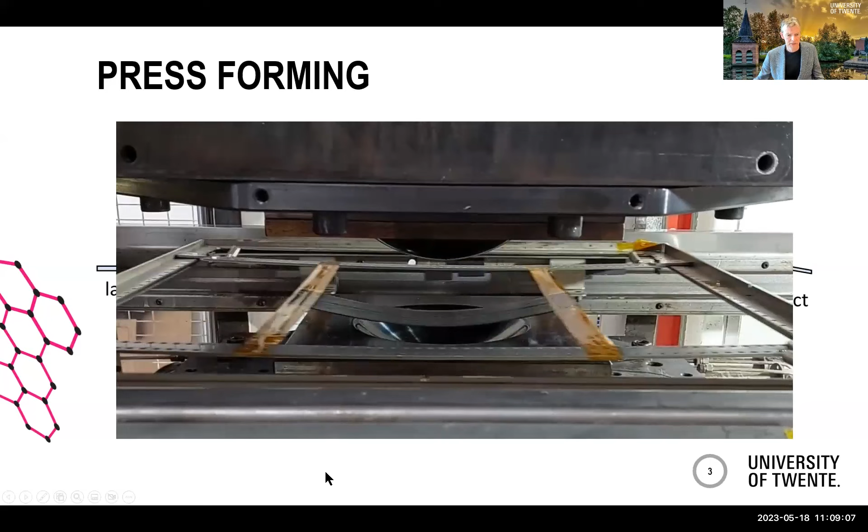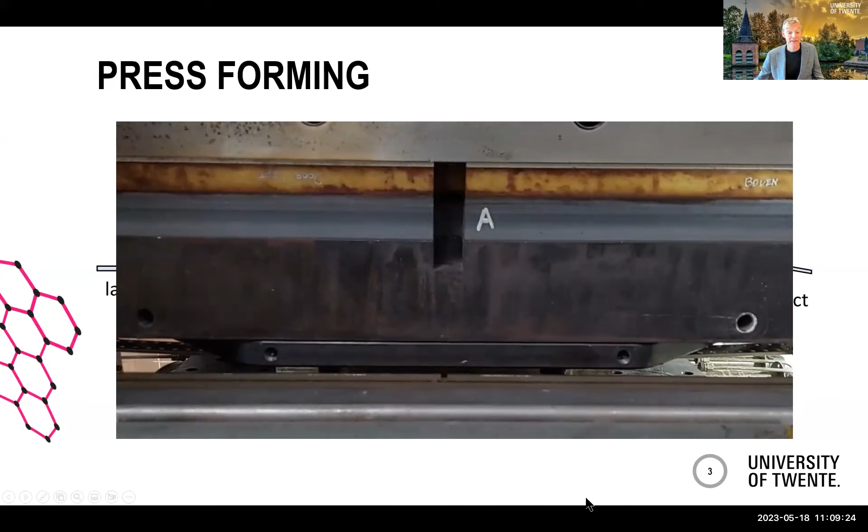So looking at this process, what does it look like in practice? Here you go: press forming. Here's a laminate, closing molds. We don't see anything, and that's it, more or less. Formed, closed, we don't know what's happening. And then we hope the product that evolves from that is good for our application.

Now things can happen in the meantime. In the time we don't see anything, with the tools closed, there can be formation of waviness at a very fine level, millimeter or sub-millimeter size, or bigger but still small wrinkles with some deconsolidation here and there. And over a fairly large spatial scale, defects like these can arise up to large folds, over longer lengths of centimeters, easily detected by the human eye. Things you don't want in your product, and things you'd rather prevent when designing a product and developing the tools to manufacture them.

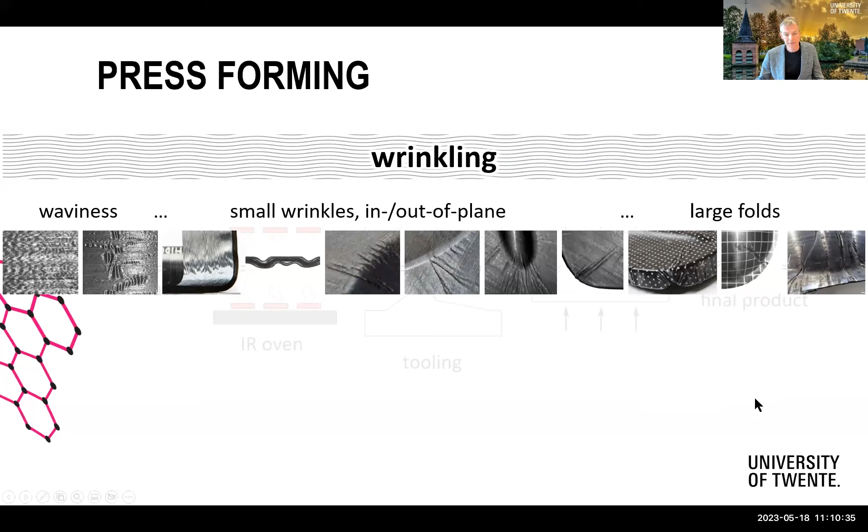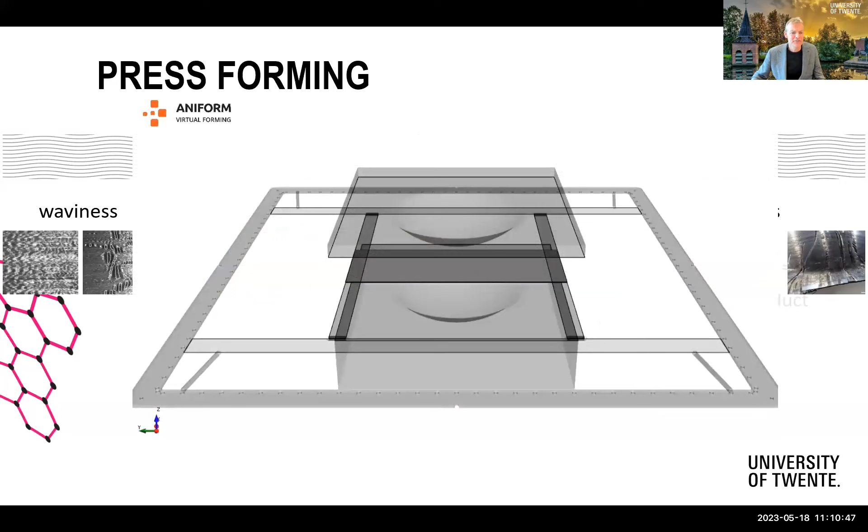Now, in between the two mold halves, we can't see anything. So even for that, simulations are already very convenient, because there we can easily see what's happening when the tool is pressed. We can see some things happening during the process. And of course, when the tools are completely closed, we can no longer distinguish any defects which have arisen.

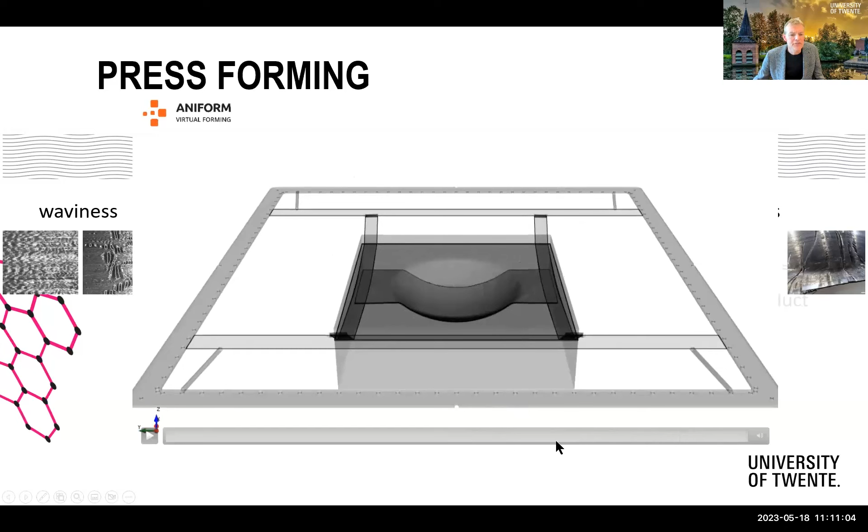Well, of course, that is very much part dependent. So here's, let's say, a fruit basket, a composite fruit basket. You always wanted to have one like these, but here you can obviously see quite severe wrinkles in the flanges of this shape.

In forming software, you have the ability to easily change the size of the blank, the shape of the blank, the laminate supports, etc. And you have the relative ease of changing the geometry of your tooling to get a product without these nasty defects, which permits actually using the products you've manufactured with all your efforts.

So today's lecture is a bit on the background of this kind of virtual forming, where there's a forming simulation requiring, of course, all sorts of input data, giving output data, obviously, which need to be interpreted. And with that, hopefully, the designer can come up with ideas for improvements.

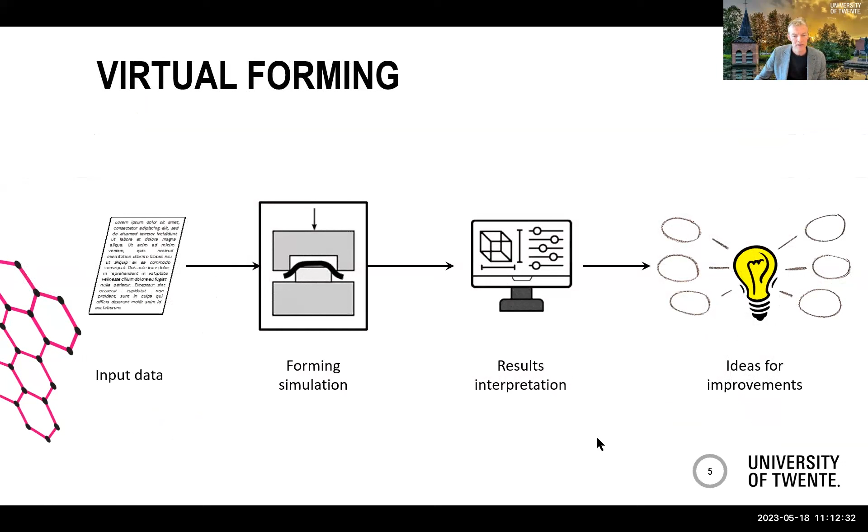So today's lecture will be on the first three items in this list: the modeling with extreme anisotropy, the input data, so the material characterization and what to do with that, and what to do with the results, the interpretation of the results, and what to do with that.

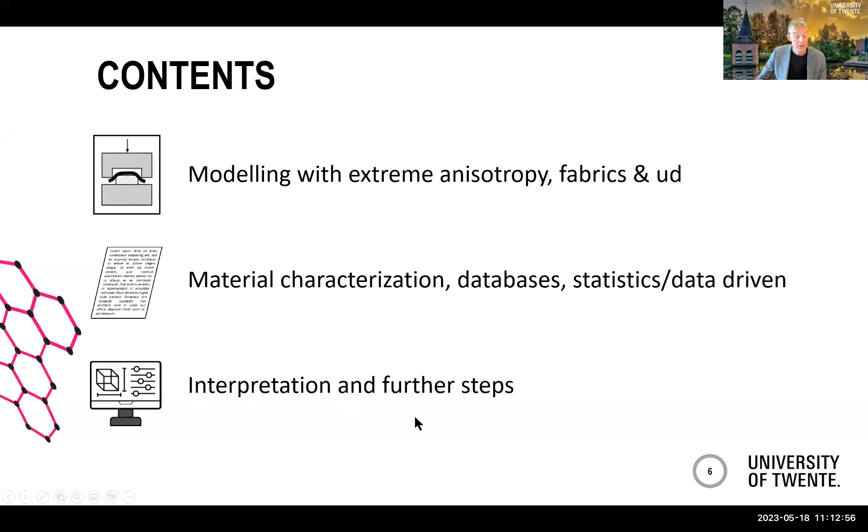Well, let's start with the basics of forming and deformation mechanisms. It's already long recognized that it's easier to decompose the complexity of composite laminate deformations into elementary deformation mechanisms.

Originally, folks worried about this biaxial effect under tension, where loading in one direction affects the deformation and stiffness in the other direction. But rapidly, the focus was more on intra-ply shear of, let's say, fabrics in this example, inter-ply sliding of plies to each other, the sliding of the whole laminate against the tooling, and the bending of plies and laminates. Whereas the latest one, compaction and consolidation, is obviously important for the final quality of your laminate, preferably without dry spots, without voids, and all these sorts of defects.

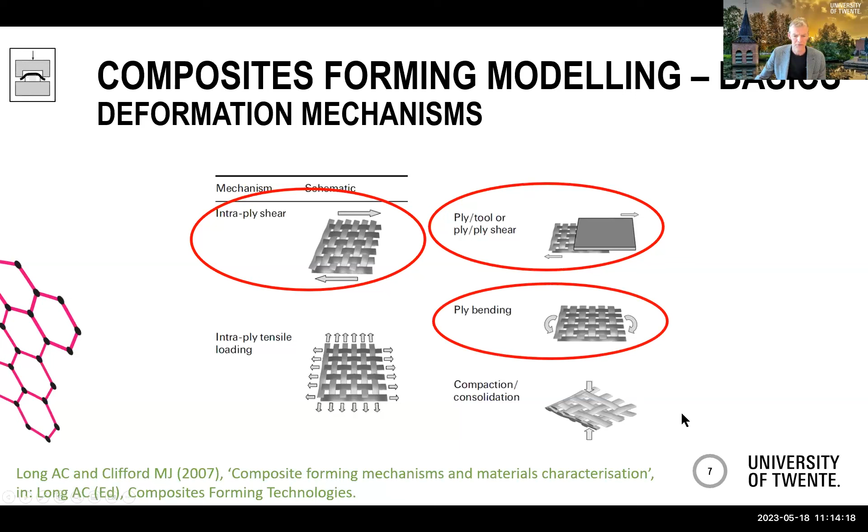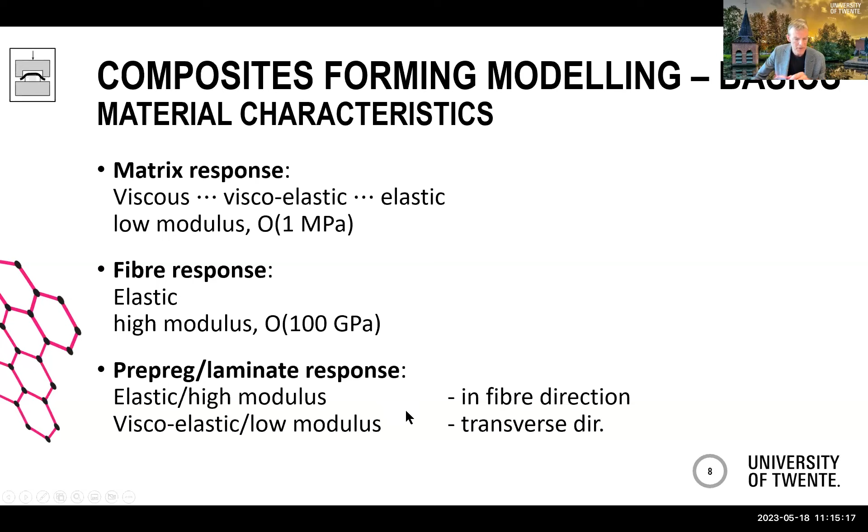If we look a bit closer at the material we're trying to describe, remember we're talking about primarily thermoplastic matrix composites in molten condition. The matrix is obviously in a viscoelastic state, and if we were to assign a modulus to that, it would typically be in a rubbery region, so low, order of magnitude 1 megapascal. Whereas the fibers remain in their elastic state, high modulus, order of magnitude 100 gigapascals. So combining that in a prepreg or a laminate, this laminate has a high modulus in the fiber direction and a pretty low modulus for any loading in any transverse direction. That gives rise to what I would call extreme anisotropy, 5 decades of difference in moduli.

And in this kind of material, large rotations and deformations are possible, except in the fiber direction. We would expect negligible fiber extension during forming. If we would get significant deformations in the fiber direction, then I would guess something is going wrong.

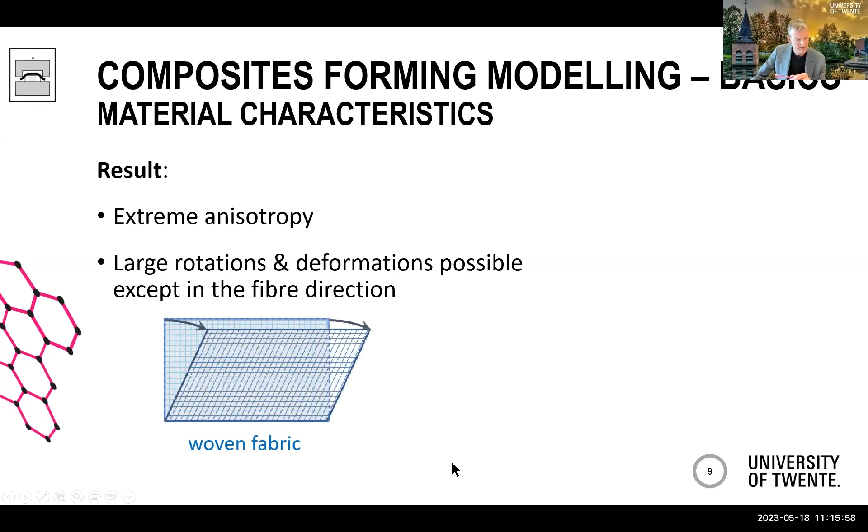So let's say a woven fabric can get significant shear deformation, while the edges in the fiber direction remain of constant length. And for UD materials, that can also shear more or less significantly, and it can also extend a bit in the transverse direction, although to a very limited scale in practice.

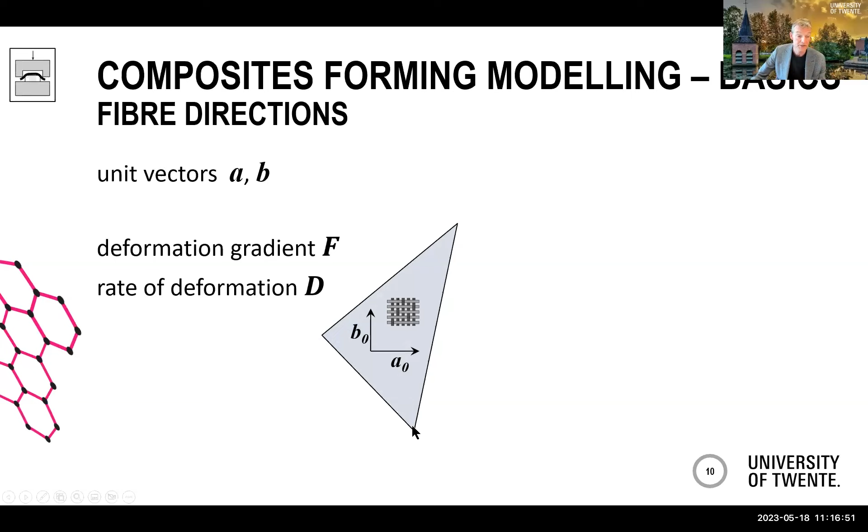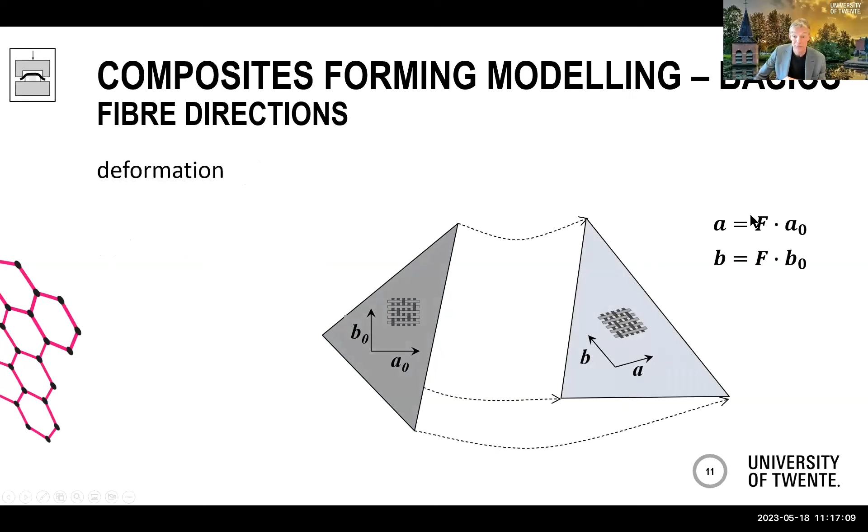Okay, how to describe this? Let's go to simple continuum mechanics. Consider this little triangle with an undeformed woven fabric, fiber orientations A0 and B0, subjected to some sort of deformation described by a deformation gradient F or a rate of deformation D, leading to a deformed triangle with other fiber directions, nicely mapped by the deformation gradient. That's all pretty standard.

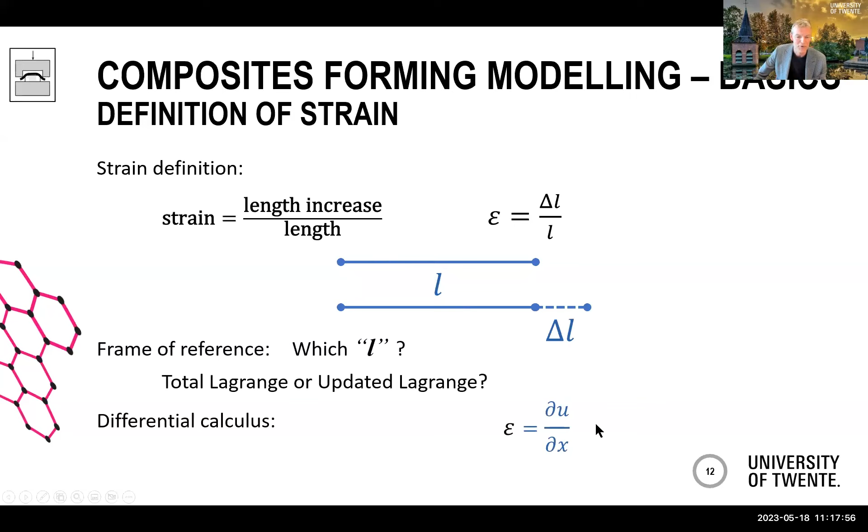From that, we would like to define a strain. Strain is pretty straightforward: the length increase divided over the original length, where you can argue about which length is your reference. Is that the original length, a total Lagrange approach, or the final length, an updated Lagrangian approach? It doesn't make a big difference for the fiber direction, at least one-dimensionally. Differential calculus tells us partial u over partial x equals the strain in the x direction. In 3 dimensions we get a few indices, not very spectacular. This is pretty standard.

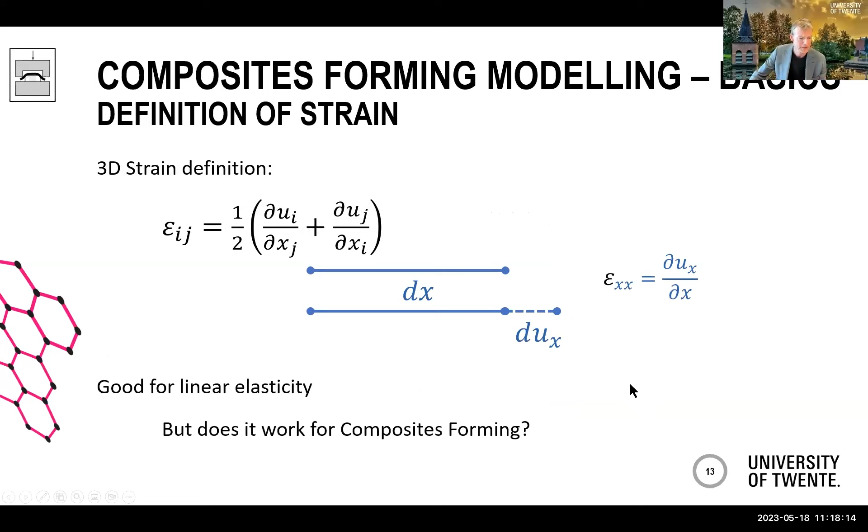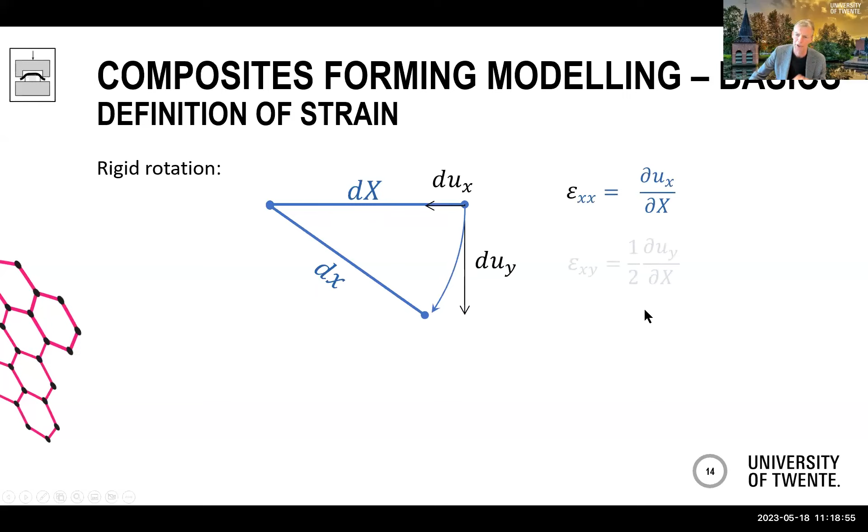Okay, we'll take the final state. Again we can see displacements, a displacement increment, or an infinitesimal strain—well, this is finite strain actually in the final configuration. Again, with this rigid rotation, we predict a non-zero strain in what we'll call the fiber direction, which is obviously wrong. If we translate this to a stress, this rigid rotation generates huge stresses because of the large modulus in the fiber direction. So that's not what we want.

Only if we take the intermediate frame of reference, halfway, can we make the displacement in the x direction equal to zero. But then we need the intermediate configuration. This is well known in large deformation finite elements, the Hughes-Winget algorithm—pretty standard by now. Often we get a non-zero axial strain except for the average configuration. So you should use the average configuration to evaluate your strains and your stresses. Nice.

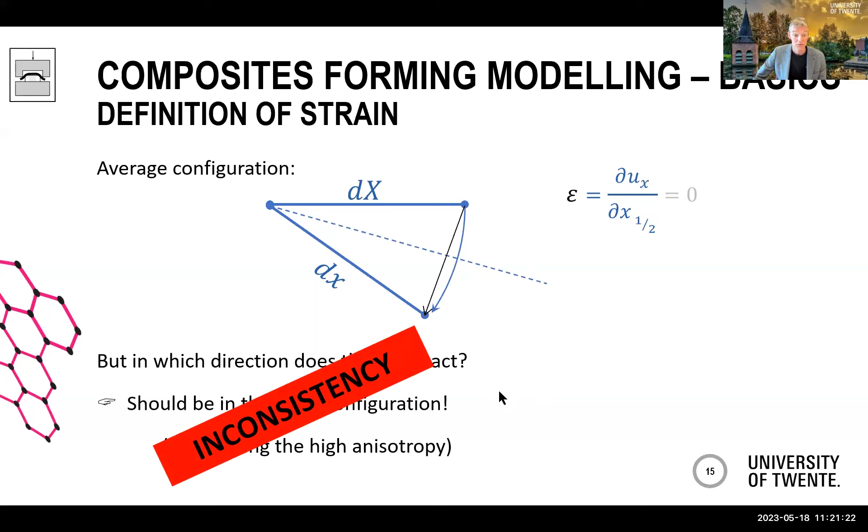The effect is, if you do a simple tensile test simulation with fibers in one direction and a modulus ratio of 10 to the power 5, this is what comes out in a classically okay nonlinear calculation, and this is the converged answer. We thought this didn't make a lot of sense, so we looked into ways to accommodate these things and figure out what was actually happening. I'm not in a position to give commandments, but I would advise using an exact strain definition when describing large deformations during composites forming with this kind of anisotropy ratio.

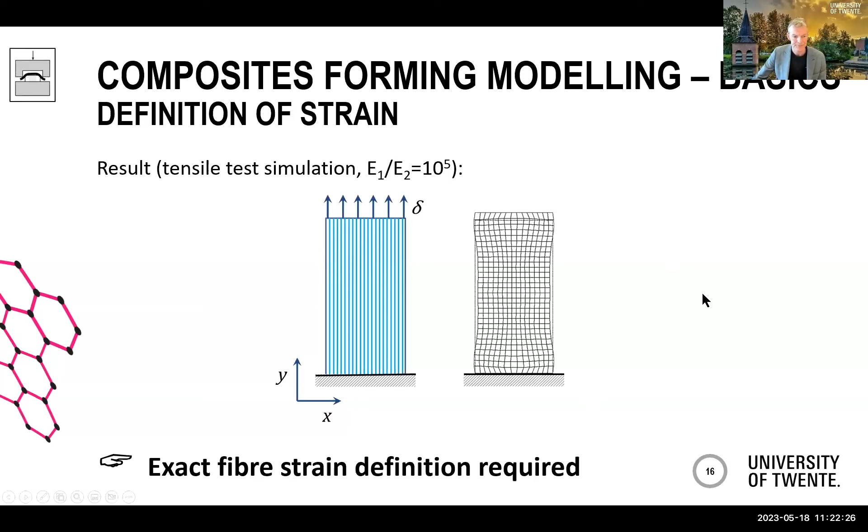Okay, so large deformation theory—what did it look like? It's always with these potatoes, right? One potato deforming to another potato. In our case we've got fiber directions; let's just take one for convenience here. So A naught is deformed, or transformed, to A by means of the deformation gradient, like this.

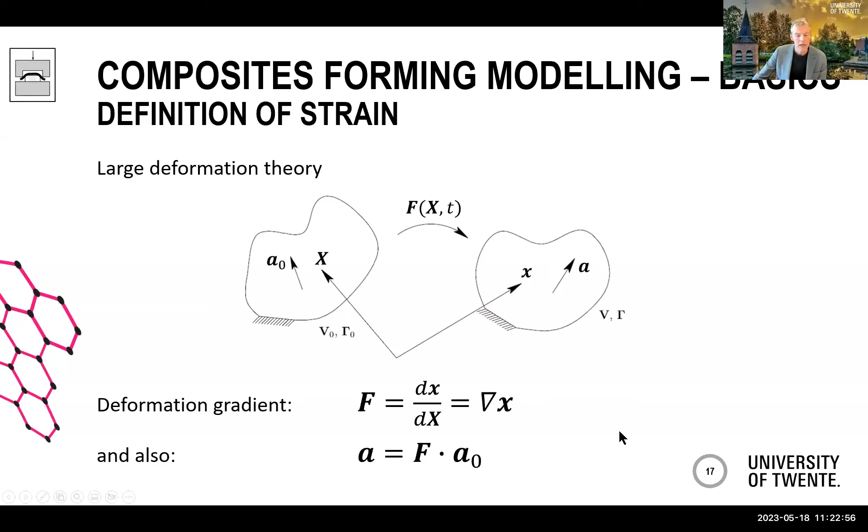Usually one would use a polar decomposition with a right stretch tensor U or a left stretch tensor V, both symmetric, and R is a nice orthogonal rotation tensor which nicely maintains an orthogonal basis. Either you first deform with U and then rotate to get your deformed situation, or you first rotate and then deform with V to get your deformed shape. Both ways lead to the same result, more or less. The nasty thing is that this retains an orthogonal basis, and in composites forming that's usually wrong, because we can have significant shear deformation, which makes it non-orthogonal in the end.

So, what to do with that? Well, we came up with the following. If I can get the next slide, please.

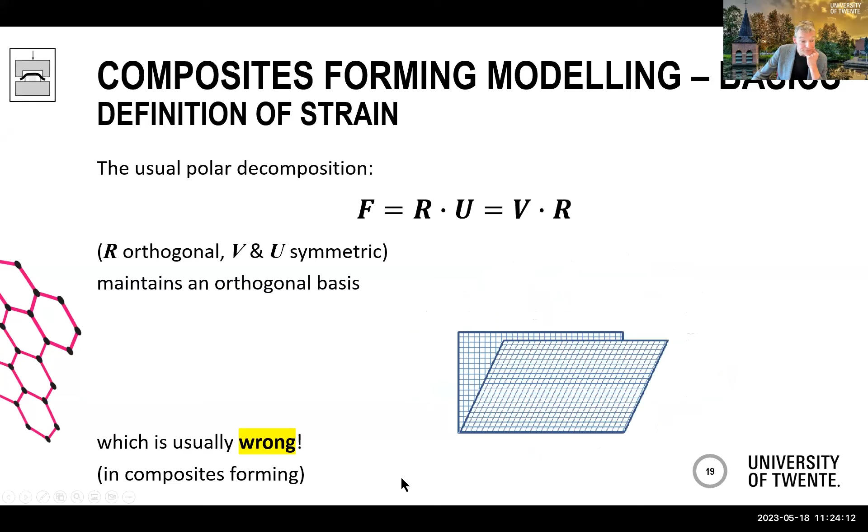We came up with the following solution. There are multiple solutions possible. Our idea was, well, let's use an alternative multiplicative split. So not U or V or whatever, we'll call it G for the time being.

We know that the current fiber direction depends on the initial fiber direction transformed by means of F, the deformation gradient. And what we wish is that the length change, any potential length change, is not part of R. Bringing that together, that means that G, our non-symmetric deformation tensor, times A naught is equal to this length change times A naught.

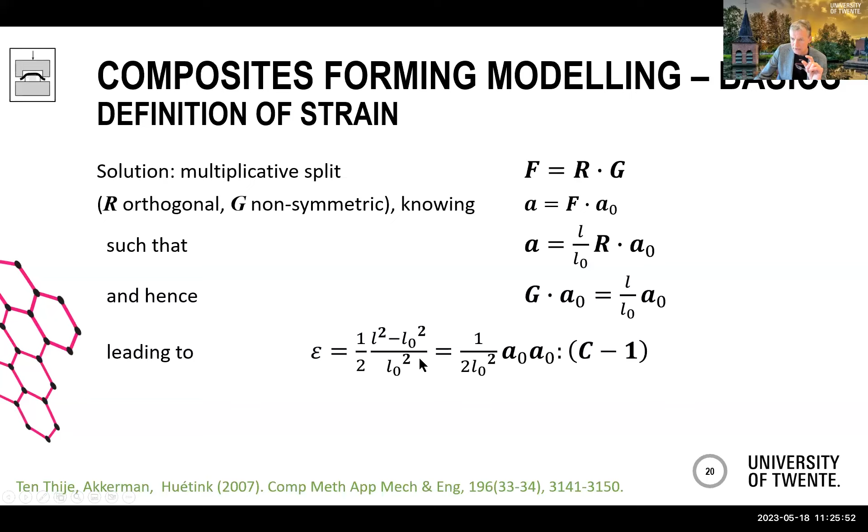Well, from this, if you go through the continuum mechanics, you can figure out that from the right Cauchy-Green tensor, you can compute nicely the strain in the fiber direction. And once you implement this, you have a formulation which correctly, exactly describes your fiber strain.

Yeah, and this is just the standard definition of your right Cauchy-Green tensor. Okay, so that for strain. Now we need to go from strain to stresses.

Okay, and yeah, we're using a viscous-like material, right? Apart from the fibers, then. So how was that for viscous materials?

Well, this is the classical, most general viscous law, where the Cauchy stress tensor contains a hydrostatic part and can be written as a function of the deformation gradient, or the rate of deformation, and the square of the rate of deformation, where these factors psi are a function of the invariants of the deformation rate.

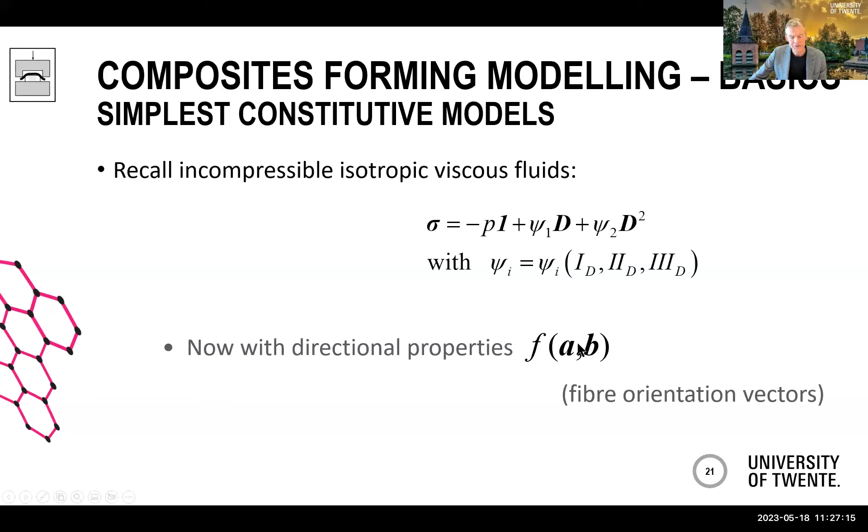And in this case, we want to go to fluids with directional properties. So functions of these, let's say a biaxial material, functions of these fiber orientation vectors. Okay, how did that look?

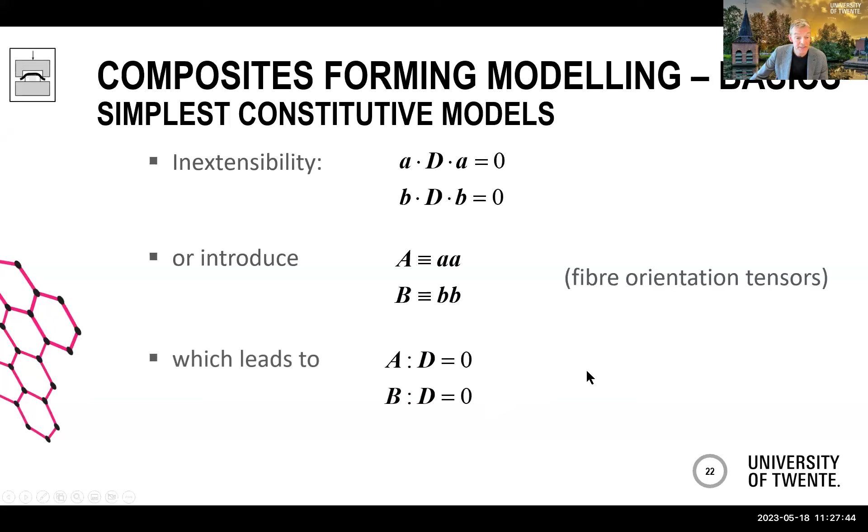Well, we've got a few constraints here. So inextensibility can be written as these products. Alternatively, you could use the fiber orientation tensors, right? So the dyadic products of the fiber orientations, A and B, and these are the inextensibility constraints, and these need to be added to the incompressibility constraint, usually written like something like this.

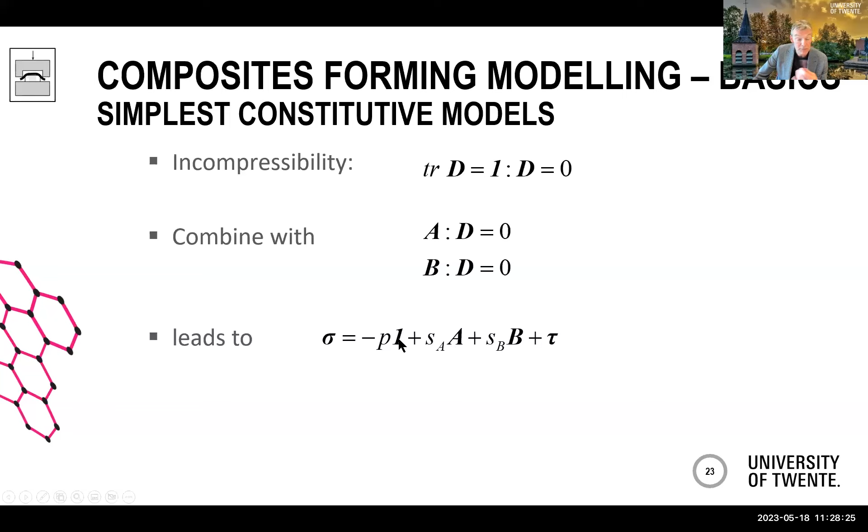So that means that we've got an extra stress in our total Cauchy stress plus 3 terms, something in the one direction, which reflects the incompressibility constraint, and something in the A and in the B direction. These 3 terms are not determined constitutively because there's zero strain in these directions, but these typically follow from the boundary conditions. So in this tau, the extra stress tensor, that's where the actual material behavior is hidden.

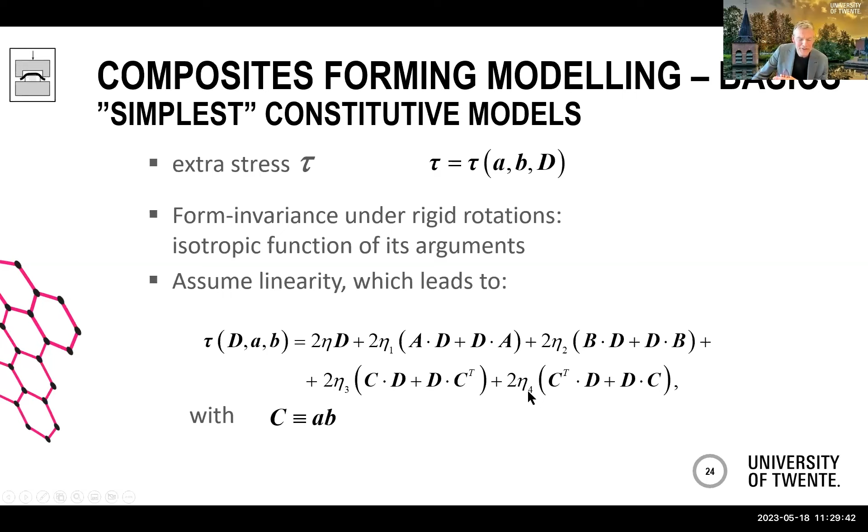I'd like to have it a bit simpler, but nevertheless, this is a well-accepted formulation introduced by Spencer, published in 2000 already, and this equation can be simplified by applying symmetry considerations.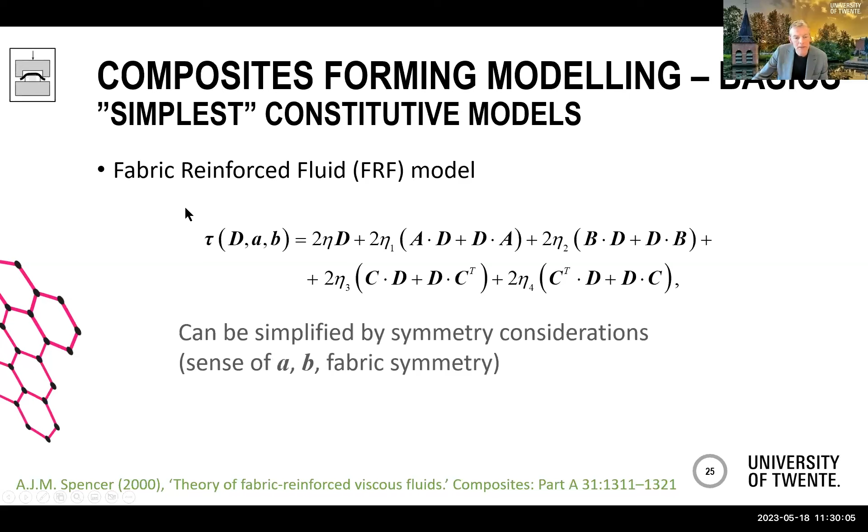Still, I thought this is a bit complicated. So I've done a bit of algebra here, and I came up with something which all brings it down to a scalar relation, some sort of equivalent shear force or stress resultant, being the division of the dissipation per unit area over the shear rate.

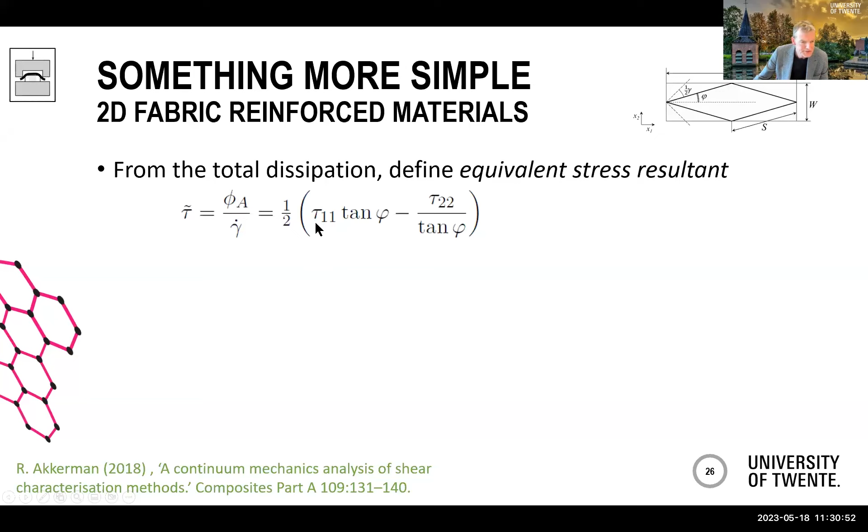And you can nicely work that out in terms of, let's say, the principal stresses or stress resultants in the bias directions tau 1, tau 2.

And if you then consider that for a plane stress situation, we're talking about composite sheet forming, where plane stress is a reasonable assumption in most cases, then you just need 3 tensors to span the space of this stress resultant.

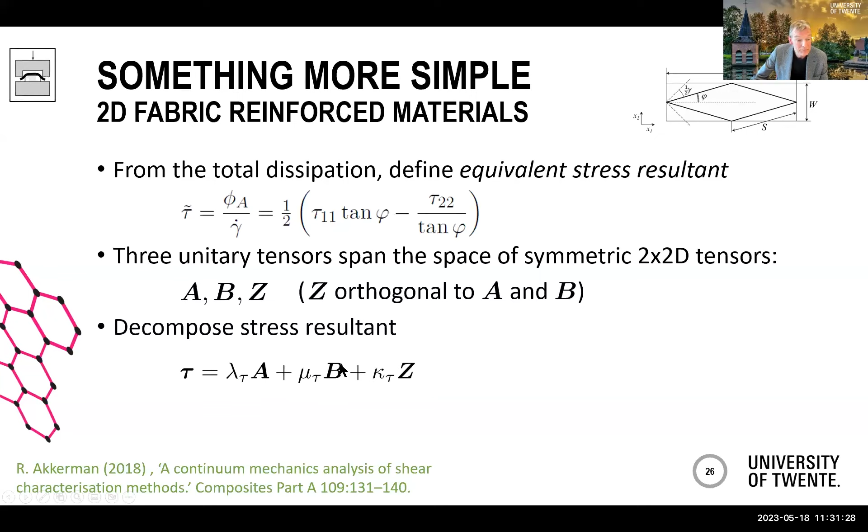And the A and B tensor are nicely in the fiber direction. So these are fiber tensions, and only this in the Z direction is representing the actual material behavior. So we just got one scalar here, and we can formulate that scalar in terms of the shear angle and this equivalent stress resultant. So we just need to characterize only one scalar extra stress variable.

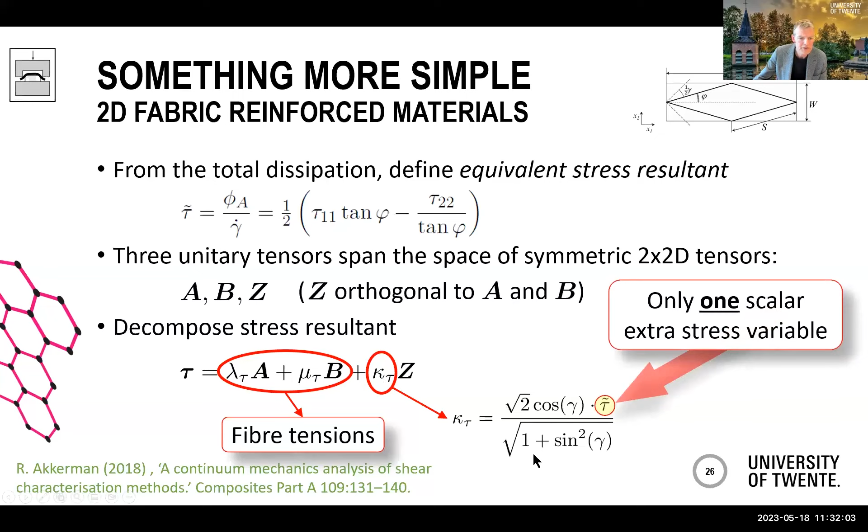And I think that makes life a bit easier. Let's see how we continue from that. Anyway, just a sideline. There are obviously other numerical aspects in composites forming. There's quite a list of them actually.

Due to the extreme anisotropy, you cannot just place your fibers in any direction. It's most secure if you align your mesh with the fiber angles. Otherwise, silly things happen. There are few elements which can work with non-aligned elements, but these are really few. Further, the large difference in stiffness or compliance in the different directions leads to stiff systems. So to get these things convergent, you definitely need consistent tangent operators. Otherwise, it's very hard to achieve convergence.

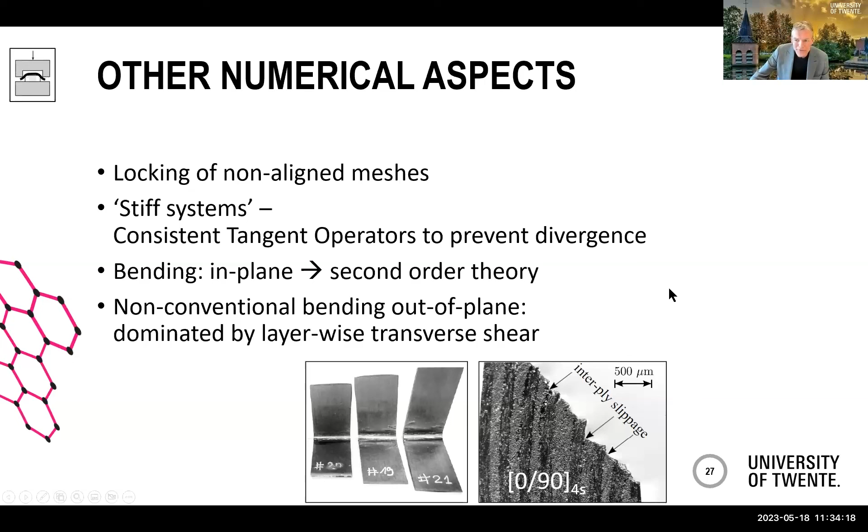Bending is another thing. If you've got bending in plane, you can imagine that the fibers are still resistant to in-plane bending as well. To describe that, you would need second order theory, where a previous lecture has gone into far more detail. And the out of plane bending is, I would say, rather unconventional. It's dominated by layer-wise transverse shear. If you look at these L shapes and inspect the edges here, you can see considerable transverse shear and also slippage between the plies. So this is quite different from what an ordinary Kirchhoff or also a Mindlin element would do. So that requires a bit of attention, to say the least.

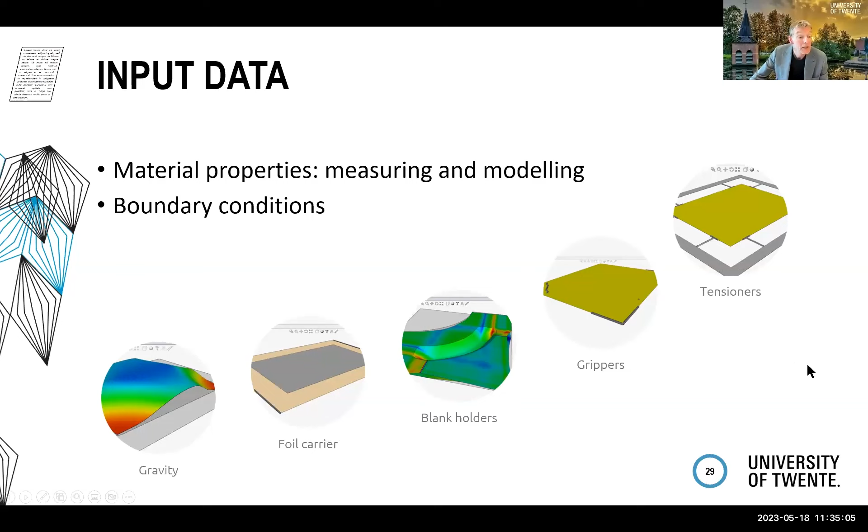Okay. Let's go to the input of this simulation box. Of course, to get a simulation running, you need material properties and you need boundary conditions. And the boundary conditions for the composite forming are non-standard. Gravity is easily incorporated, of course, but typically a laminate could be carried by foils, by blank holders or grippers, tensioners, all that sort of stuff. Luckily, these sorts of things are available in specific software. What I would like to go into is the material properties in a bit more detail.

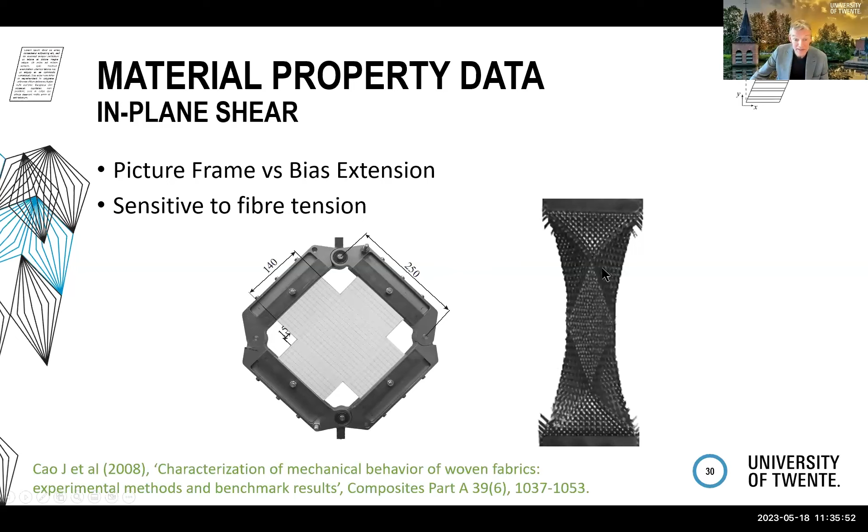As mentioned, we had these deformation mechanisms, and the first one was in-plane shear. In-plane shear can be measured in various ways. The standard ways would be typically a picture frame, or bias extension, so extending a plus minus 45 degrees fabric or fabric ply or laminate in the bias direction and inducing shear, which is inhomogeneous over the different regions in a specimen like that. That's not so much a problem in the picture frame experiment, but the picture frame experiment is very sensitive to misalignment. And if you have a bit of fiber tensioning in this experiment, you're measuring the fiber stiffness more than the actual shear behavior you were looking for.

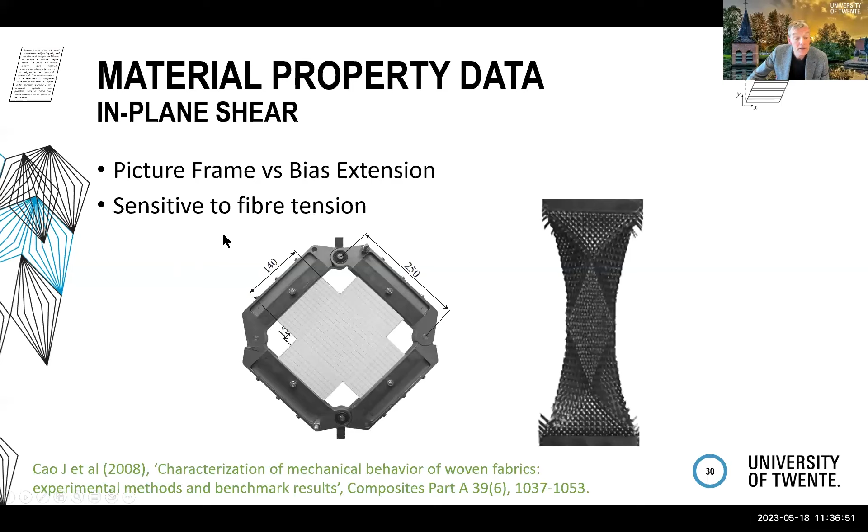Anyways, that's been researched extensively. We had a very nice benchmark years ago, and gradually, I think we're getting to a stage where we sort of understand what's happening in these kind of experiments, and we've got a reasonable idea how to translate measured force displacement data to actual shear stress or stress resultant versus shear angle data. The response is typically something like this: the force versus the shear angle, or the force resultant. Typically, the force or the resistance to shear increases with shear angle. This is on a woven fabric reinforced PPS, and if we increase the rate, then the resistance against shearing also increases.

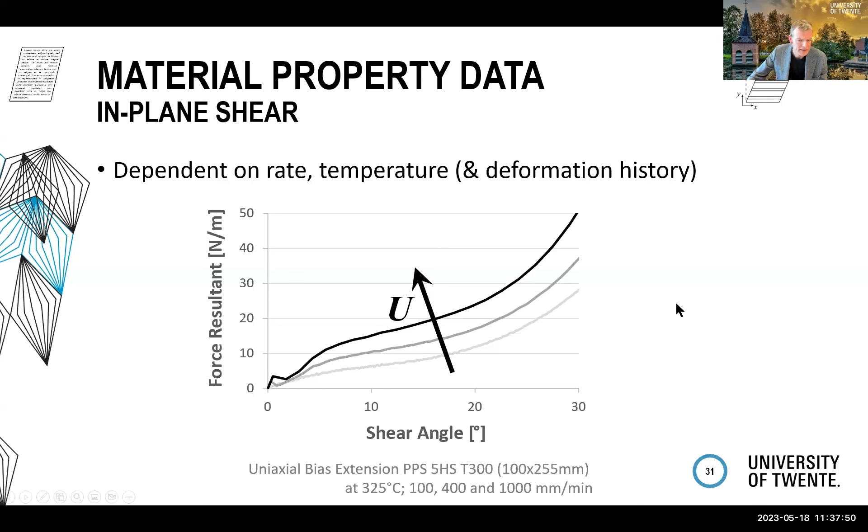So when describing this material behavior, you need some viscous-like element in your constitutive model, plus obviously a nonlinear elastic element, something like that. You can formulate it in many different ways. For unidirectionals, we had little success with a picture frame and with bias extension. So we came up with a torsion bar. This is a pretty thick UD bar, which we were able to mount into the rheometer. Then you have a nice controlled environment, doing standard geometry with large or small oscillations. You can measure the torque against the amount of torsion, and you can translate that to representative constitutive models. But that's also sort of under control, I would say.

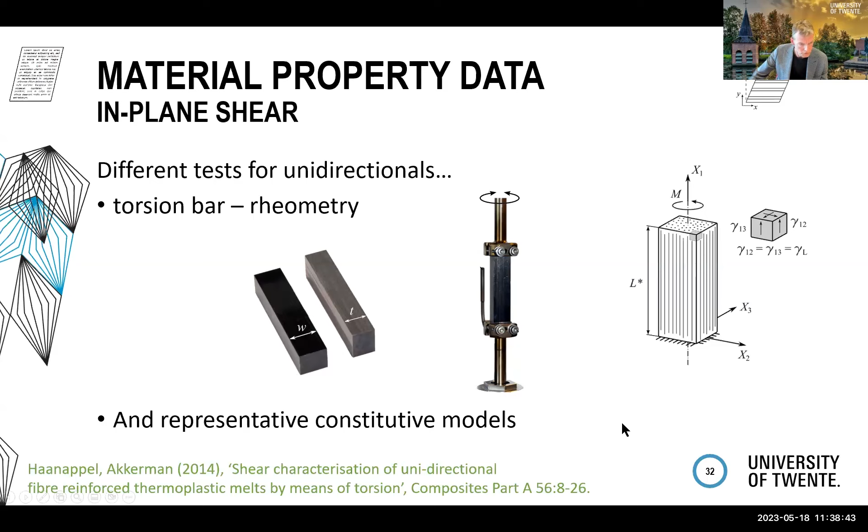Then we go to the next mechanism, friction, sliding of plies against tools or whatever. You can do that in different ways. You can go for a pull-through experiment where you pull a laminate or a ply between two rigid tools. Then you may have some entrance effects, or you may pull it out, something like this. But then obviously the pressure is varying and non-uniform during your test. That makes it a bit awkward to interpret.

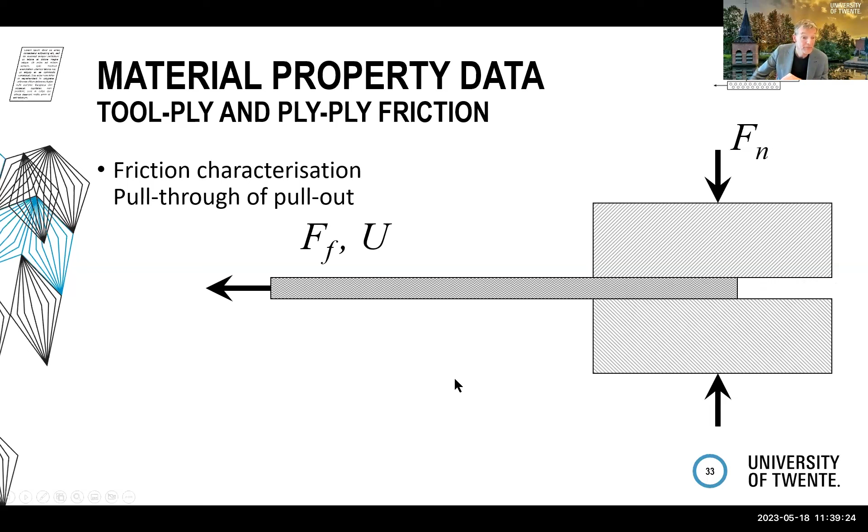Also here, benchmarks have been performed. Currently, there's also one ongoing. So let's see how we progress there. Quite a few different setups, and I do have the feeling that there's room for improvement. Of course, we believe what we are measuring, but the others are measuring other things. So let's see how we progress. Part of the game.

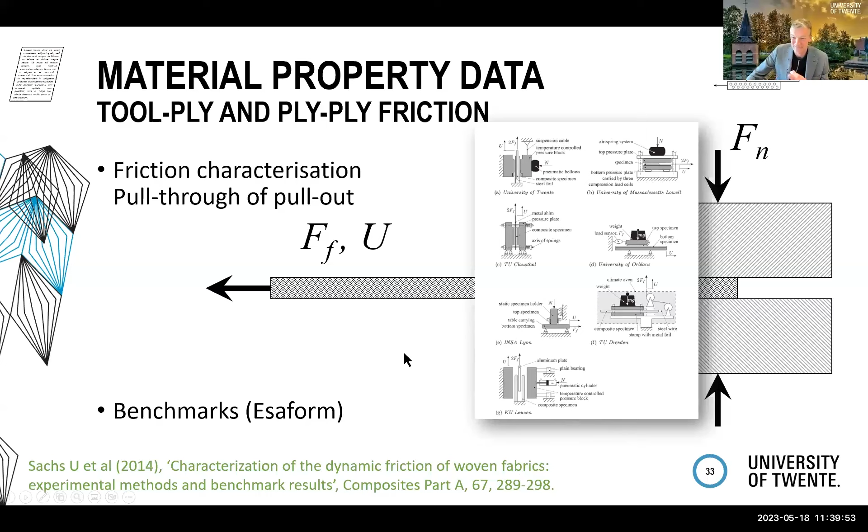This is our setup, which we just mount in a regular tension tester, and a typical response. Let's translate the pulling force to a coefficient of friction and plot it against the displacement of a ply.

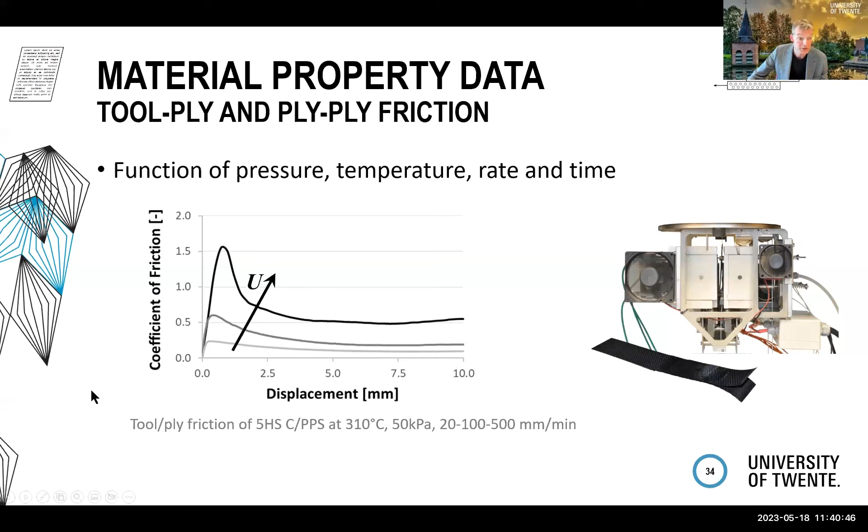If we do the test very slowly, we reach quickly a sort of steady state friction. Here we have a bit of overshoot, and the faster we go, the more overshoot we observe. This is something to take into account in the friction model you would use in your forming simulation. It does, by the way, also depend on the fiber orientation.

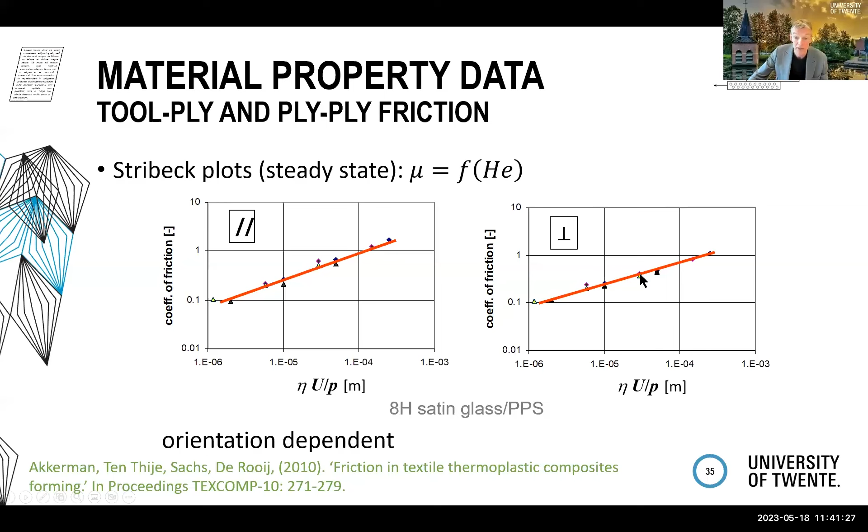Bending, the third mechanism I would like to discuss briefly with you. Well, this is the classical Kirchhoff bending, normal cross sections remaining normal to the center line. Obviously, these composite laminates are subject to transverse shear during bending as well, and obviously there may also be slip between the plies. So what to do with this?

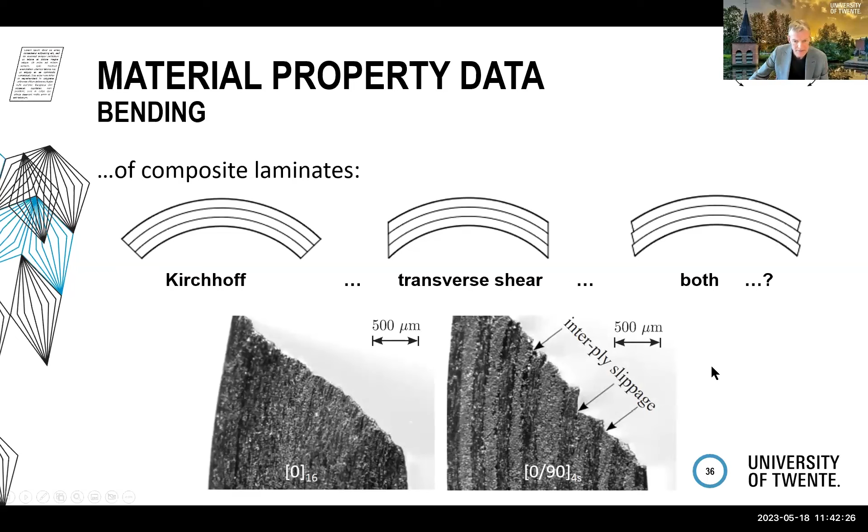You can go for a static cantilever test introduced in 1930 already. It's less than 100 years ago, but still of considerable age. So seeing how a laminate deforms under its own weight and gravity. Of course, doing that on thermoplastic laminates, you need to heat this box to forming temperatures.

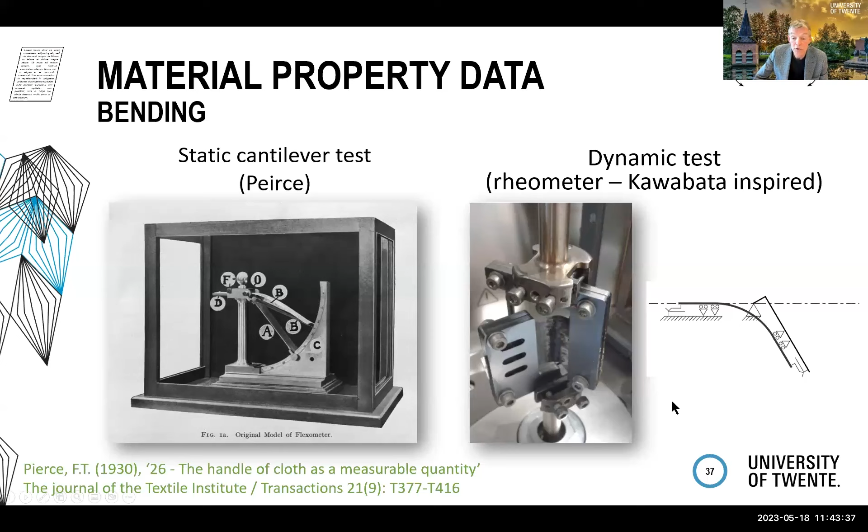We thought it would be convenient to do something that is sensitive, or that can measure the sensitivity to rate as well, to be able to control the deformation rate. So we came up with this Kawabata-type inspired setup, again in the rheometer, so we can use the rotation of the rheometer to bend this specimen, which can be a laminate or a single ply. We can measure the torque and plot that against, let's say, the rotation, or translate it to the curvature of this specimen. And this is a typical response you would get.

So the bending moment increases with curvature, an elastic effect, and if we increase the rate, then obviously the stiffness, or the apparent stiffness, also increases.

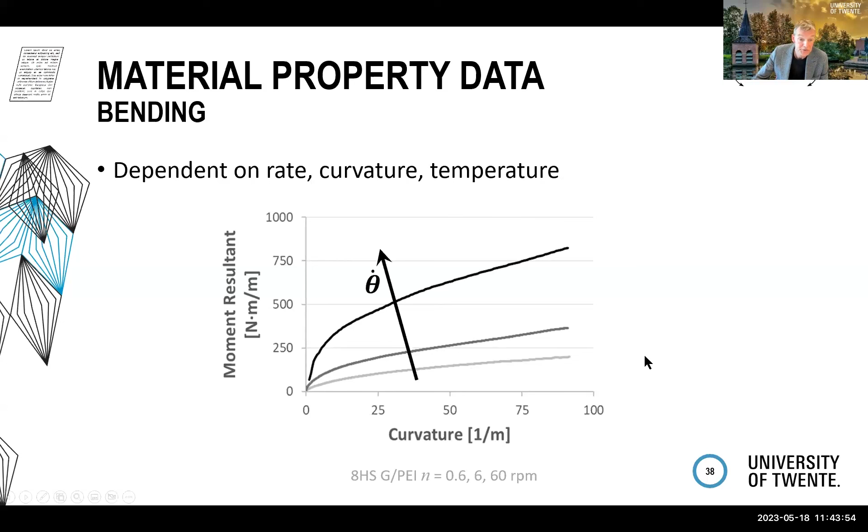To understand what we're measuring, we did this sort of mesomechanical analogon with elastic fibers separated by a viscous matrix. And if you go through the equations, then you end up with this diffusion equation of the rotation angle. Well, that then apparently should describe the bending behavior of a structure like this.

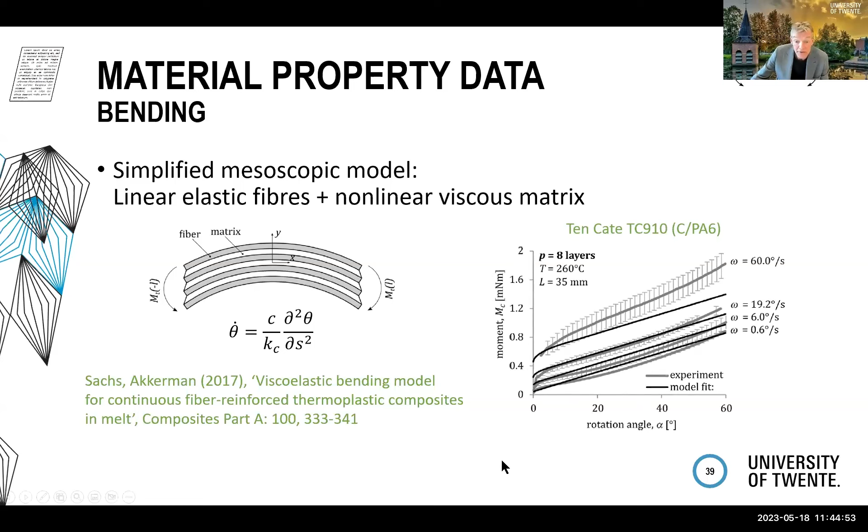Let's see how that works. If we use this kind of model and evaluate it by means of the bending moment versus the rotation angle, we get these black curves, which reasonably represent what we're measuring, apart from an increase in apparent stiffness at the higher rates. That's not included in this particular model. So again, there's room for improvement.

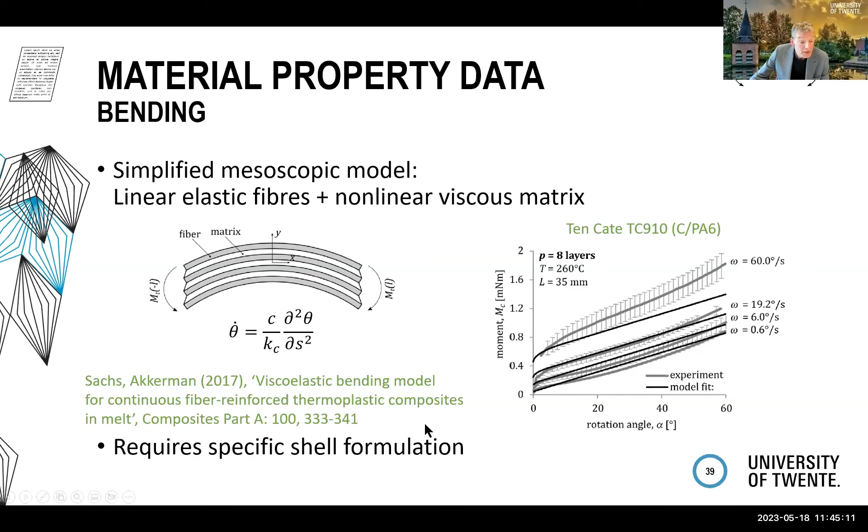And of course, this being very different from the classical elastic bending, this will also require a specific shell formulation to account for this.

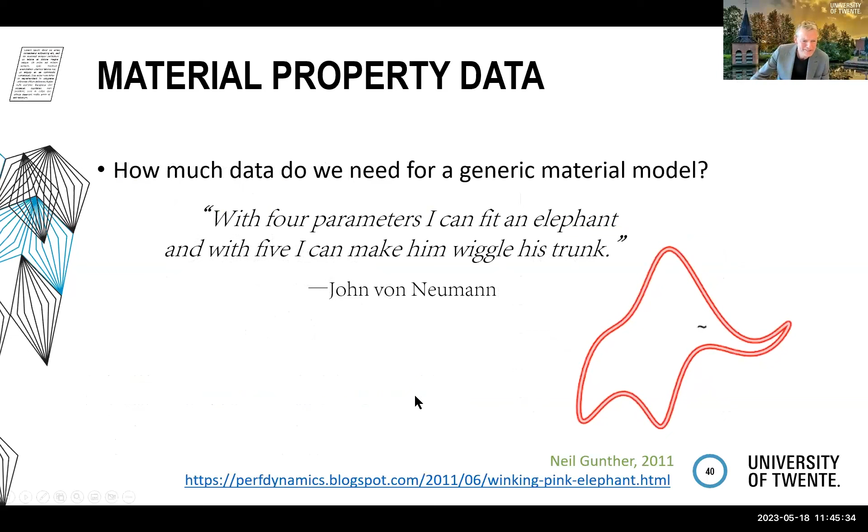Well, then the question is, okay, we're measuring things. How many parameters do we need to describe a material? The classical quote from John von Neumann is: with 4 parameters I can fit an elephant, and with 5 I can make him wiggle his trunk.

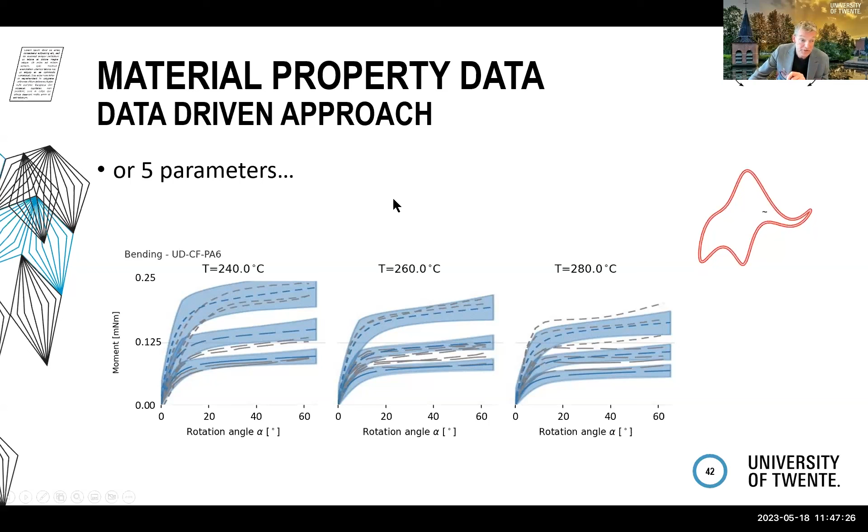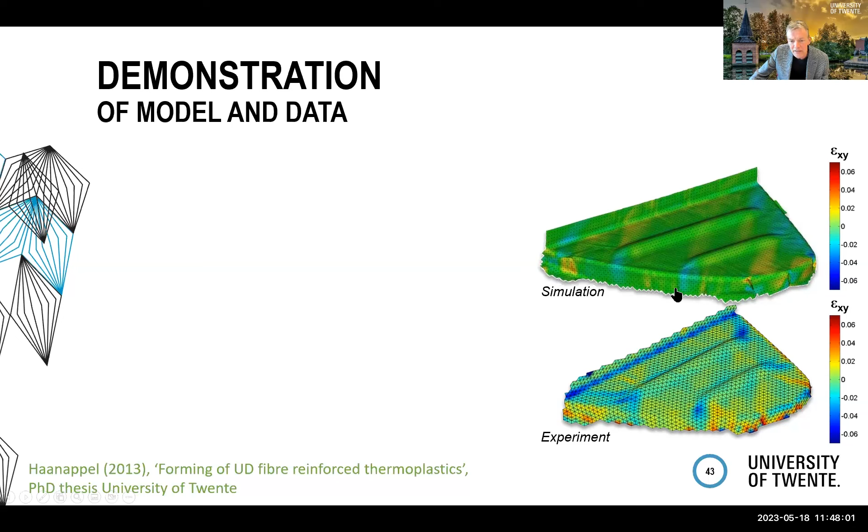Concluding on all this modeling stuff, here's an example from a few years ago, about 10 years ago, where we compared DIC data. A grid was plotted on a formed laminate, before and after forming, and from that we could get the strain distribution, the shear strain in this case, and compared it to the simulated results. We were reasonably pleased, I must say.

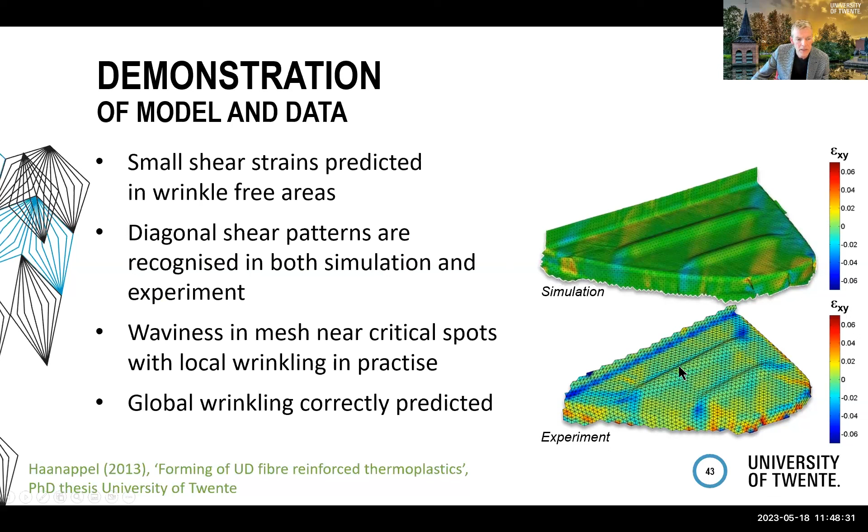The green areas show small shear strains, predicted in the wrinkle-free areas. We can recognize some diagonal bluish patterns, which we also see in the experiment, where we predict waviness. We also saw local wrinkling in practice, and the global wrinkling is correctly predicted. These are spot on, provided you have accurate material characterization data and an accurate representation of the boundary conditions. It sounds trivial, but it's easily overlooked. So pretty happy with this.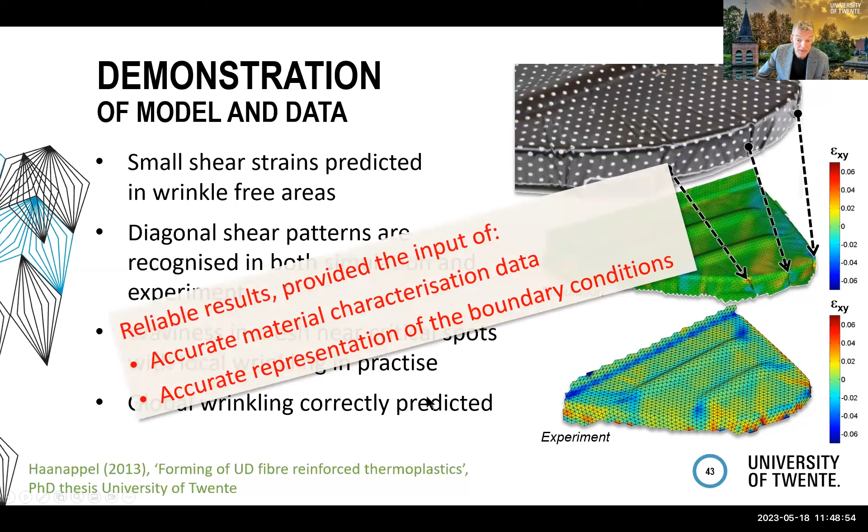So, last part - what to do with all this data. We set out to predict manufacturing defects. So what are defects then? These could be ply splitting, transverse cracks, matrix degradation - that sounds like temperature, oxidation, and that sort of situation - voids, dry spots, delaminations.

Probably connected to consolidation pressure, surface defects could be due to severe traction, so sliding stresses, contamination - that's more a workshop thing - fiber distortions and fiber breakage.

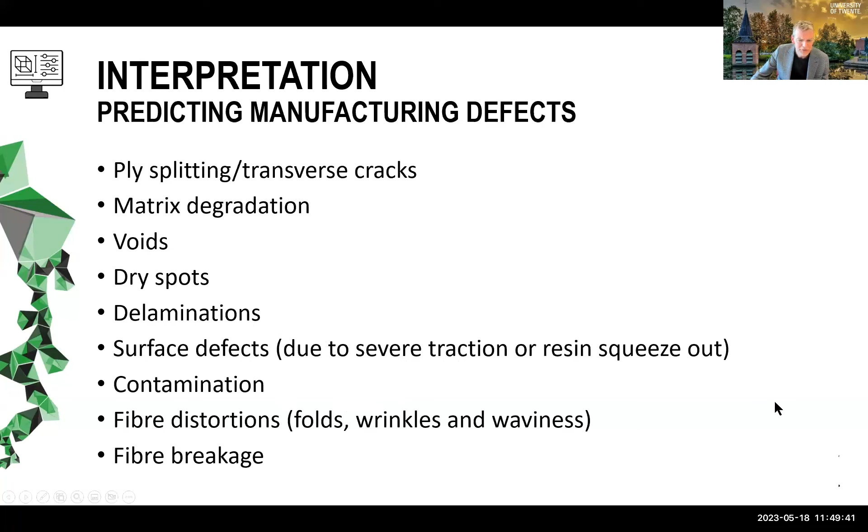If we look at what the simulations bring us, transverse stresses will relate to this defect. Voids, dry spots, and delaminations will relate to the normal stresses during our forming simulation. For friction, we can look at the shear stresses in our contact elements. Fiber tensions will have an effect on resin squeeze out and fiber breakage. And that sort of practically only leaves us with fiber distortions, folds, wrinkles, and waviness.

The thing I started with, if you remember from my second slide, something like that. The nice thing about these simulations is that we can see what the laminate is doing during the deformation, during the forming process. At incomplete tool closure, we can look at whether waviness or buckling regions arise.

In the actual laminate, you'll have the gray line over here, and if the elements are small enough, they will simply follow the large buckles. The smaller these wrinkles become, the harder it becomes to represent them with the elements. So this one is definitely sub-element level - very hard to represent in the actual simulation.

But still, something may happen if there's a bit of compressive stress in the laminate direction. If we go from an open tool to a closed tool, the large defects will simply lead to folds at complete tool closure. The medium ones can be pressed between the two tool halves and can sort of rotate to waviness in plane. Whereas the small ones can be compressed, leading to compressive stresses without any in-plane waviness.

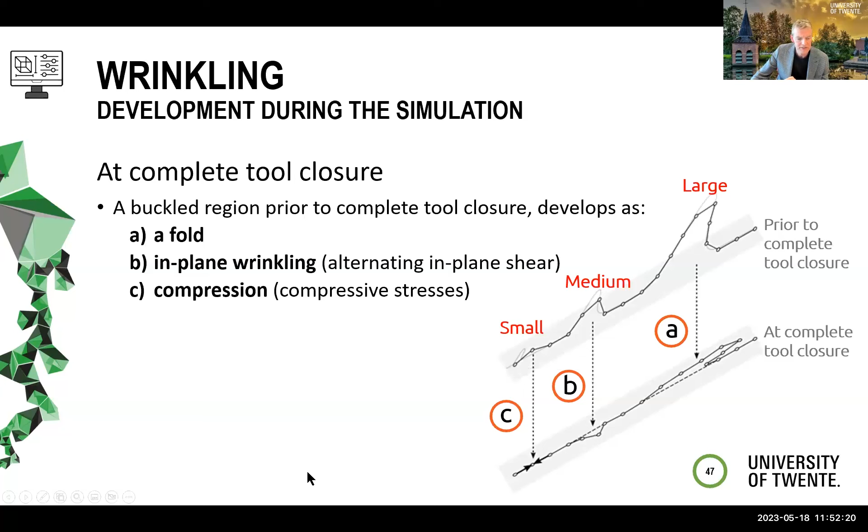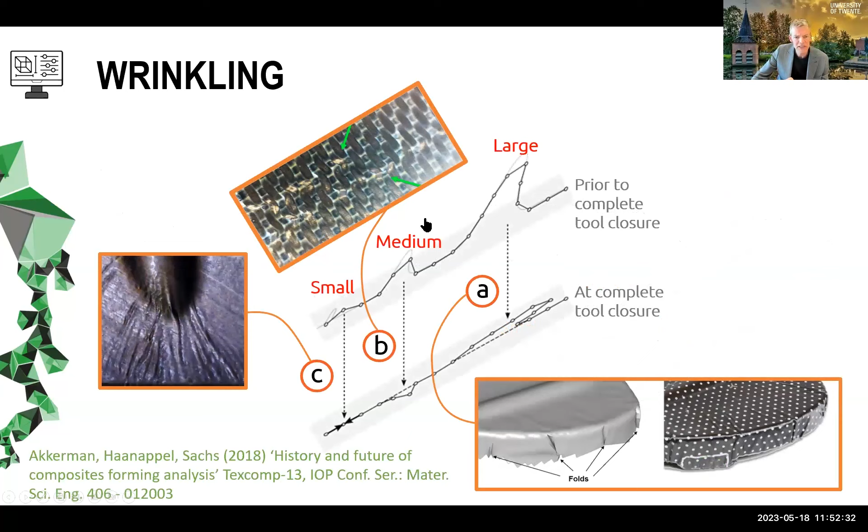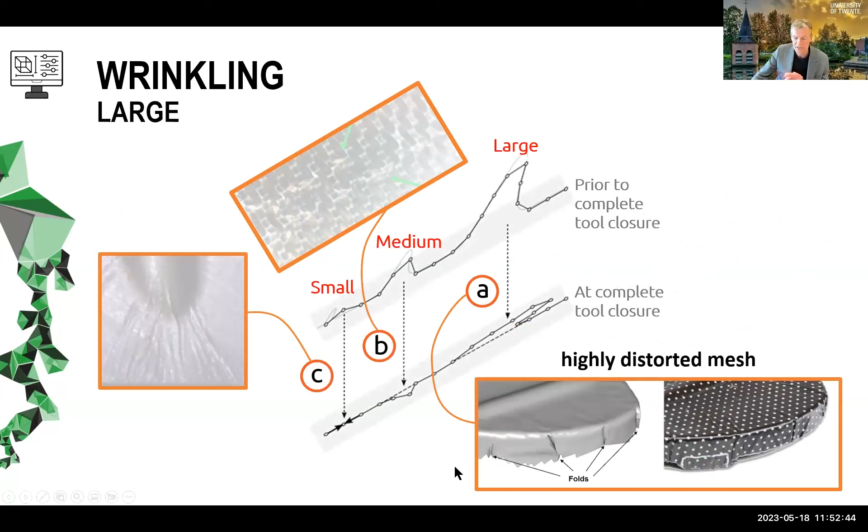So let's have a look at what that looks like. Here we've got very small defects, some in-plane waviness, medium defects, and some large folds. We've already seen that these large wrinkles give rise to a highly distorted mesh - these are easily seen in your simulation.

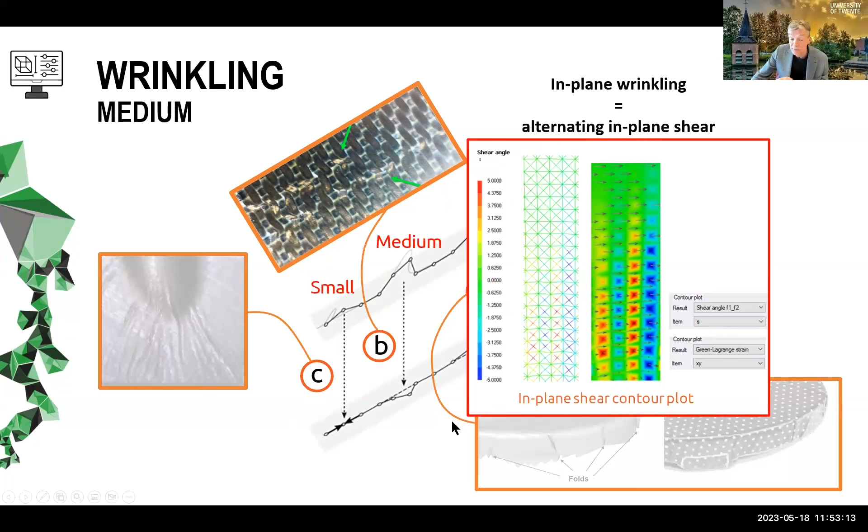The medium ones, if we look at areas like this, what we observe - looking at the shear angle or the accompanying shear stresses - we nicely see this alternating in-plane shear at regions where these kinds of defects are occurring. So these can also be detected just by looking at the simulation data. These are typically related to the blue colors, negative stresses in the different plies, where we get compressive stresses that nicely relate to these micro buckled regions. So the simulation provides information to predict these kinds of defects.

So various stress components can serve as indicators of various defects. And it's also very useful to look at what happens during the process - buckled regions will be a starting point for the final folds and wrinkles in the final product. So not everything needs to be simulated explicitly, not only with finite element methods. However, better defect indicators would definitely help the software user.

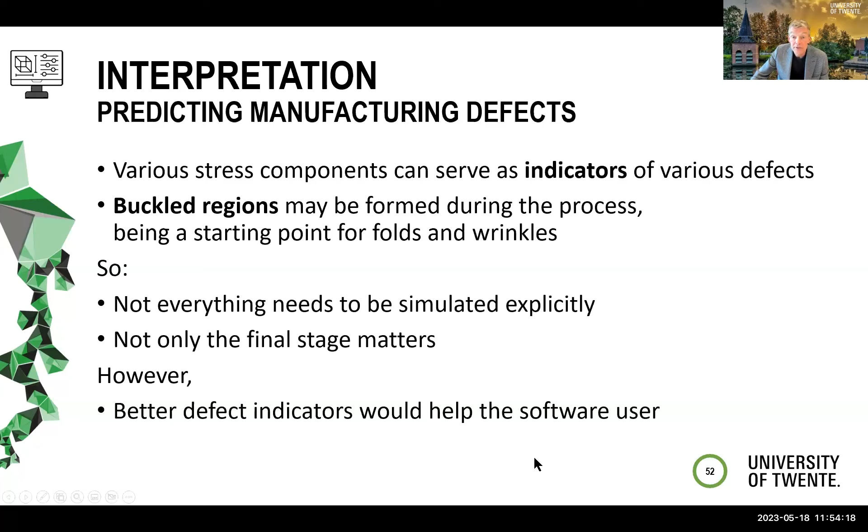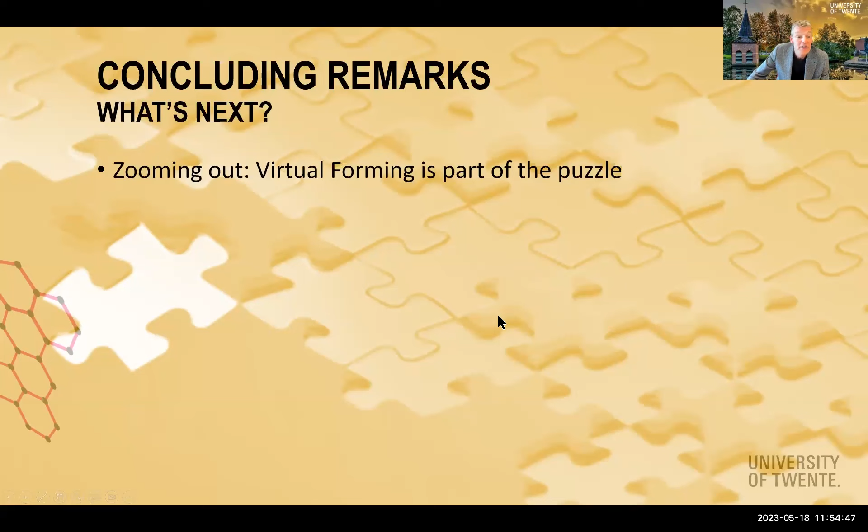Concluding this one - what's next? In the end, virtual forming is only part of the puzzle. I would, of course, say the forming determines the structure of your part, so if you can't predict your structure correctly, you'll have a hard time predicting the performance of your structure. But nevertheless, let's be fair - virtual forming is only part of the puzzle.

And first of all, this part can be improved. Yes, we're looking for more accurate constitutive models, more accurate finite element formulations, and more accurate defect indicators. And all this requires ongoing benchmarking, both on the experimental side and on the modeling side.

Being part of the puzzle, this kind of software needs to be integrated in design systems. Digital twins are all over the place, incorporating more and more information. There's a whole list of those. Sorry for the amount of text, but you can imagine it's part of a bigger thing.

Subsequently, it only makes sense if the tools can be used, if the tools are accessible. So you should get your software out of the academic environment into commercial applications, including documentation, training, maintenance, updates, also the material characterization and an accessible database, all that sort of stuff.

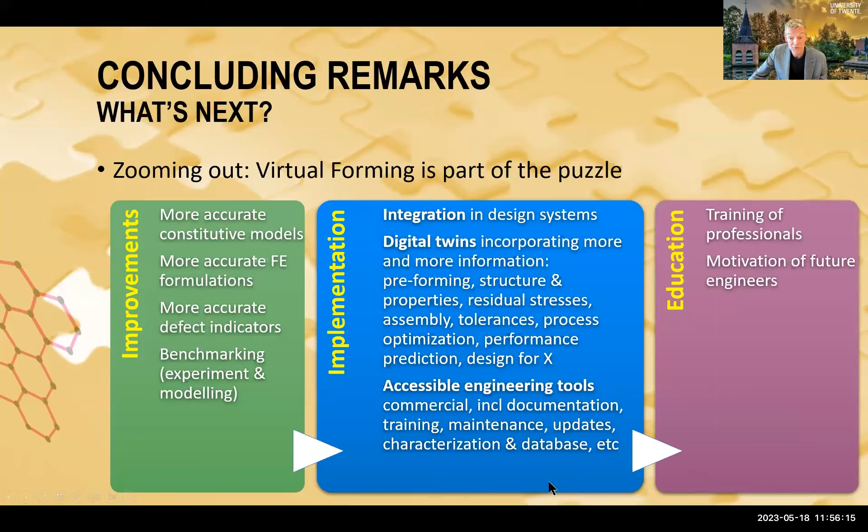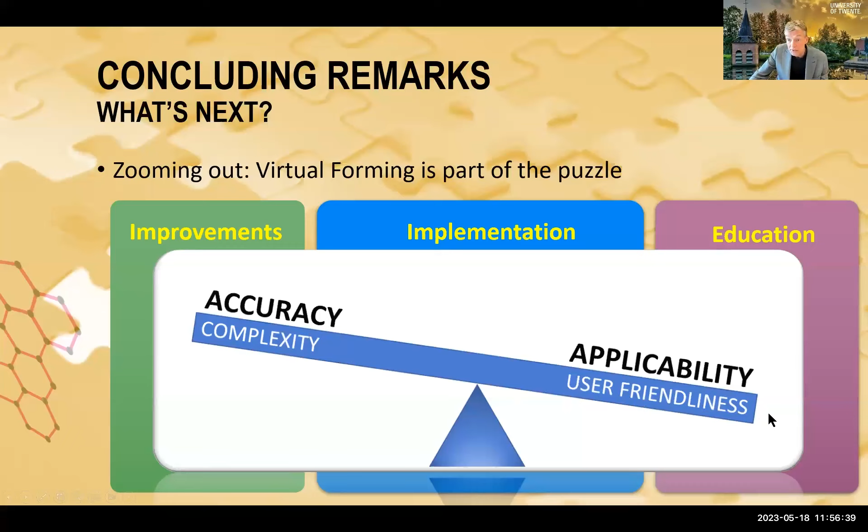And finally, we can only get this to work if we are able to train professionals in using these kinds of tools and to motivate future engineers. All this together gives you a sort of balance: on one hand we'd like to have more accuracy, but probably that goes with more complexity of the software tools. On the other hand, we want more applicability, where user friendliness is an obvious thing to strive for.

Mr. Akkerman, thank you very much. We'll look for some questions here from the audience; we have a few minutes. We've talked a lot about the different characterization. Someone raised a question right off the bat: how much does the matrix properties influence wrinkling in your experience?

It's a combination of the matrix behavior, so low viscosity versus high viscosity definitely makes a difference. Further on, it's also the reinforcement structure, which is pretty important, I would say. So even comparing one carbon PEEK material to another carbon PEEK material with different pre-pregging processes and different structures, that makes a difference. I hope that answers the question.